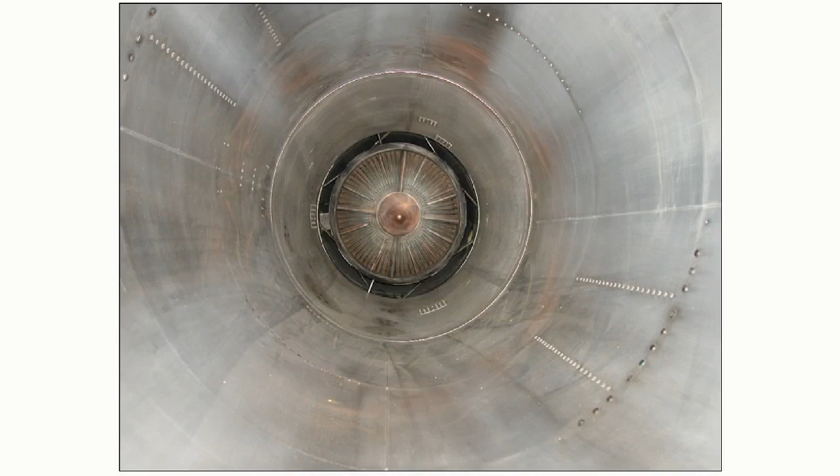The exhaust system of a gas turbine engine is an often underrated part of the propulsion unit, yet its design exerts a considerable influence on the performance of the engine.

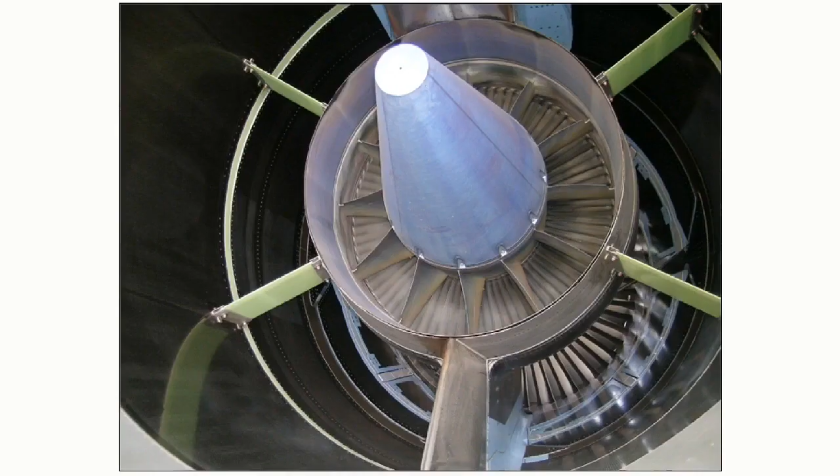The gases which discharge from the turbine must exit in the correct direction and at the optimum velocity to provide the thrust of the turbojet engine. While in the turboprop engine, where the thrust is provided by the propeller, the turbine gas temperature and back pressure at the turbine are, to a large extent, dictated by the design of the outlet nozzle.

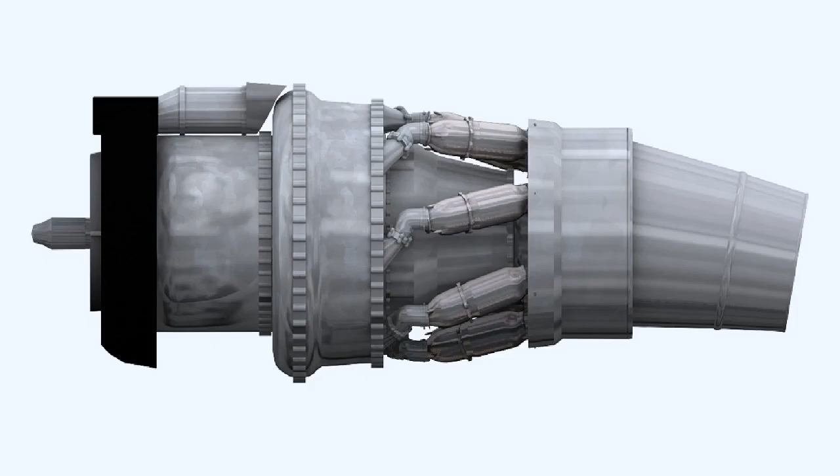The temperature of the gases entering the exhaust system can be between 550 and 850 degrees Celsius. This temperature can rise to as high as 1,500 degrees Celsius if an afterburner, sometimes called a reheat system, is used.

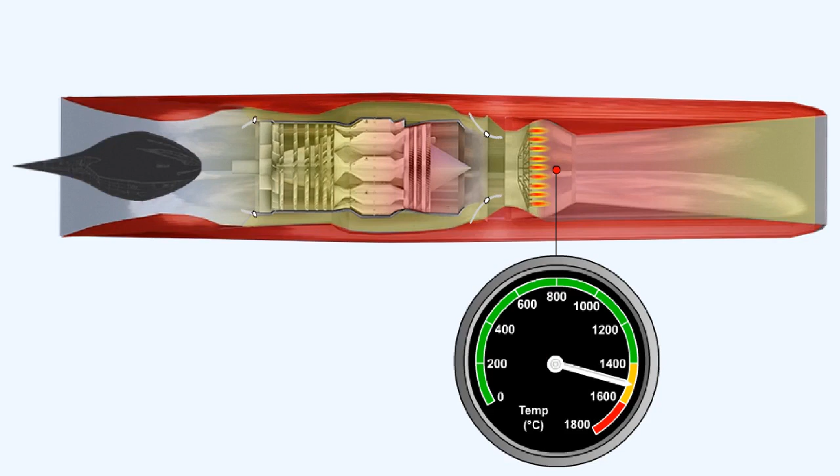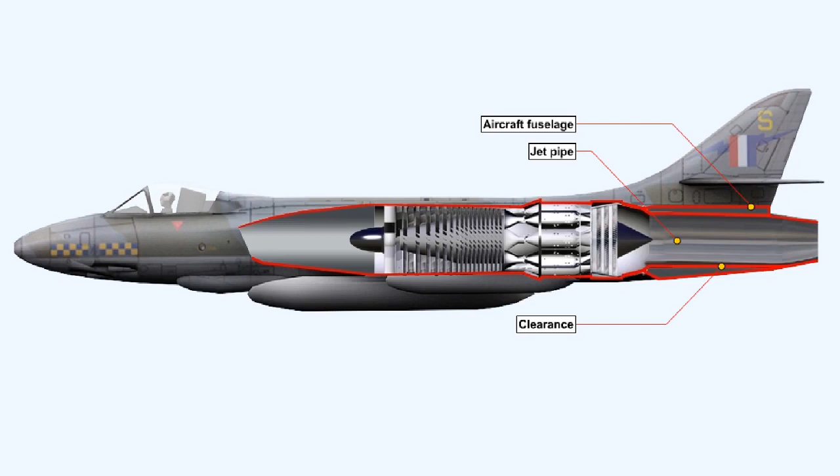The fuselage of the aircraft, if it has the exhaust system running through it, as happens with most jet fighter aircraft, must be protected from these temperatures. This is done by both allowing a clearance between the jet pipe and the aircraft skin, through which air is allowed to circulate, and insulating the jet pipe with some form of fibrous material sandwiched between thin layers of stainless steel.

The velocity of the gas as it leaves the turbine can be between 750 and 1,250 feet per second. This is somewhere around 0.5 Mach. If this gas has to negotiate a long jet pipe before being ejected into the atmosphere to provide thrust, a great deal of turbulence will be caused within the pipe. This will lower the efficiency of the engine and reduce its thrust.

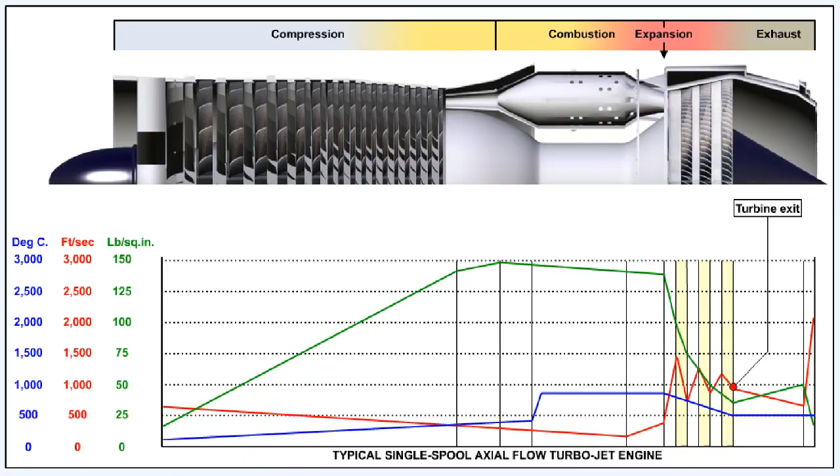This diagram shows the basic layout for the jet pipe of an aircraft without afterburners. Although the shape of the jet pipe outer casing appears to be convergent at the point where the gas leaves the turbine, the shape of the volume within the casing is in fact divergent.

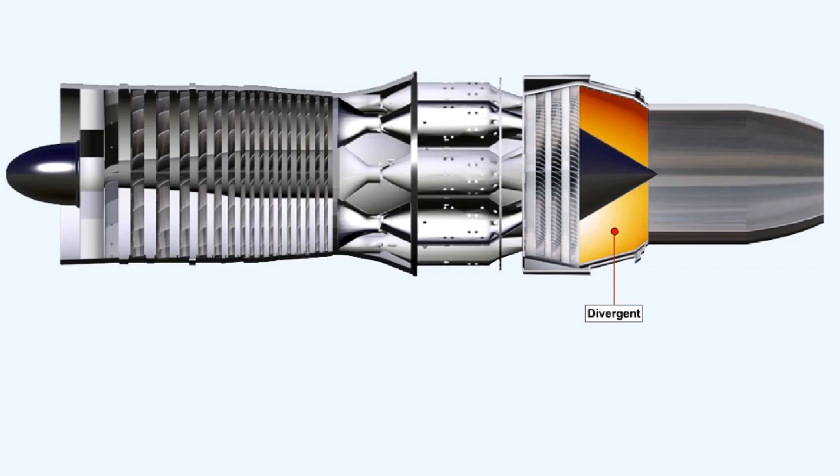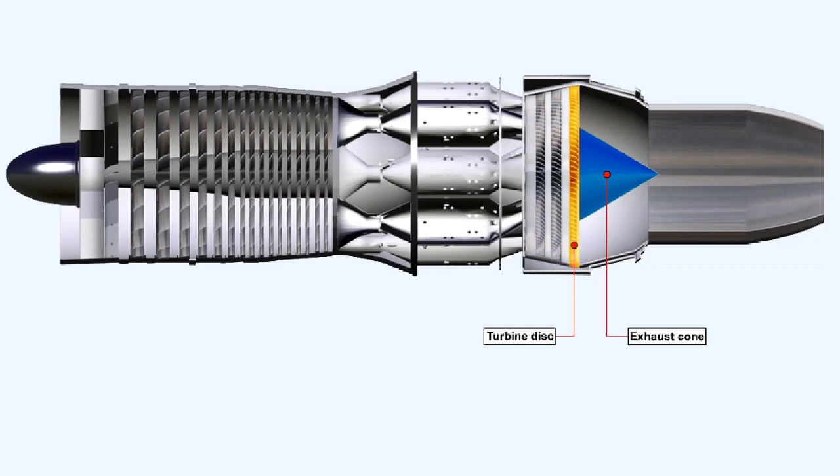The divergence is made possible by the insertion of the exhaust cone, a conical-shaped device positioned close up to the rear turbine disc rear face.

As well as helping to reduce the velocity of the gases leaving the turbine before they pass down the length of the jet pipe, so minimizing turbulence, the exhaust cone also prevents the hot gases flowing across the rear disc face of the turbine, further reducing disturbance and preventing overheating of the disc.

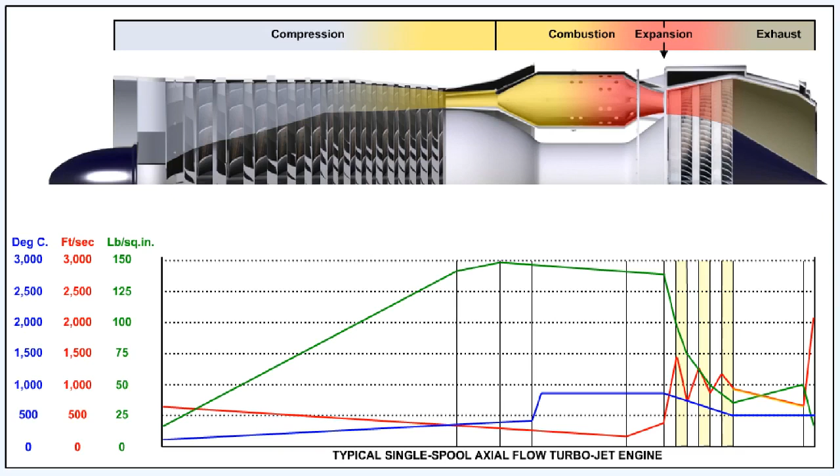The rear turbine bearing is also supported inside the exhaust cone via turbine rear support struts, which are streamlined by fairings.

The fairings also straighten out any residual whirl which may exist in the gas stream as it exits the turbine. This residual whirl would cause additional losses through generating turbulence if it was allowed to pass into the jet pipe.

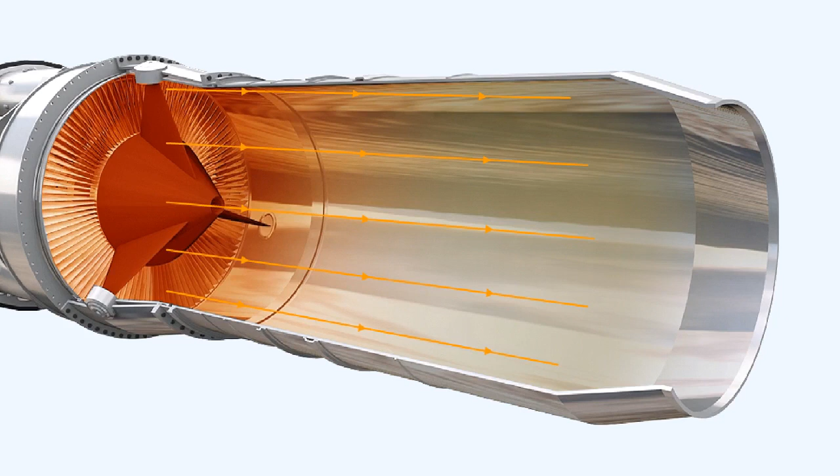The exhaust gases travel down the jet pipe and finally exit to atmosphere via the convergent propelling nozzle. The convergent propelling nozzle increases the gas velocity to speeds of Mach 1, the speed of sound in relation to the temperature of the gases, in a turbojet engine at virtually all throttle openings above idle. At this velocity, sonic speed, the nozzle is said to be choked.

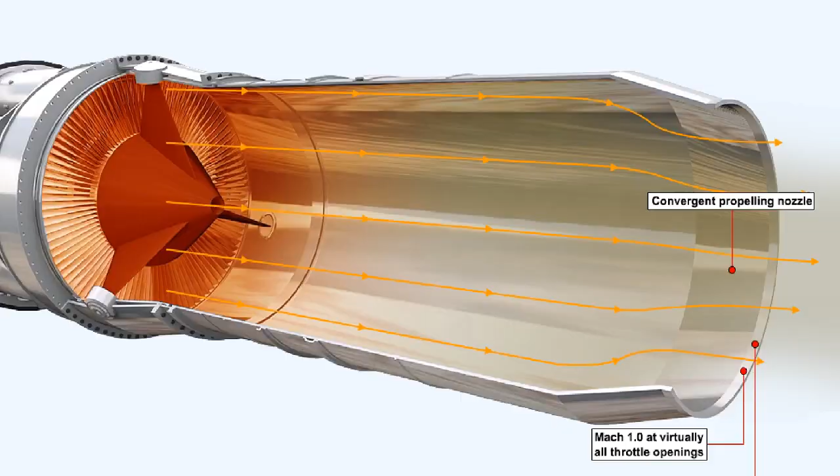The area around operating gas turbine engines is inherently dangerous to personnel and equipment. This diagram indicates the primary danger zones around the intake and exhaust of an engine similar to the type fitted to the Cessna Citation. The more powerful the engine, the further these zones will extend from the engine.

Notice that the gas velocity exiting the engine is extremely high, as is its temperature, although the levels of both drop quite dramatically with increasing distance from the exhaust nozzle.

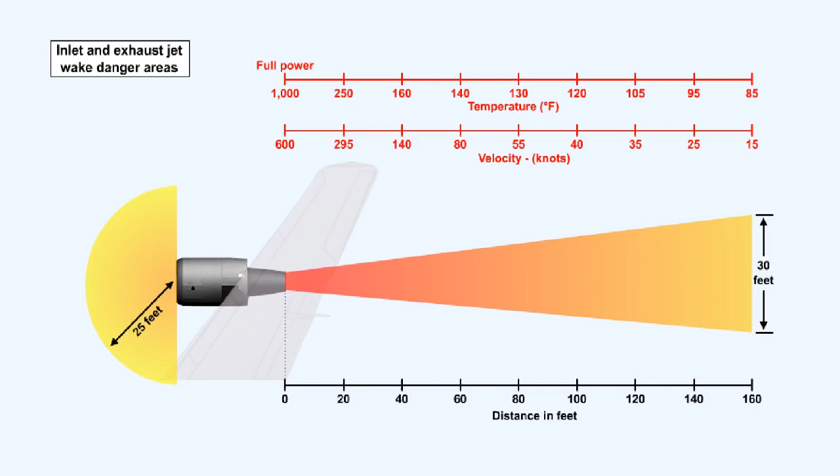The area behind an operating gas turbine engine is just as dangerous as the intake area. This short video was staged to show what can happen if the engine exhaust danger area is entered without recognition of the perils involved.

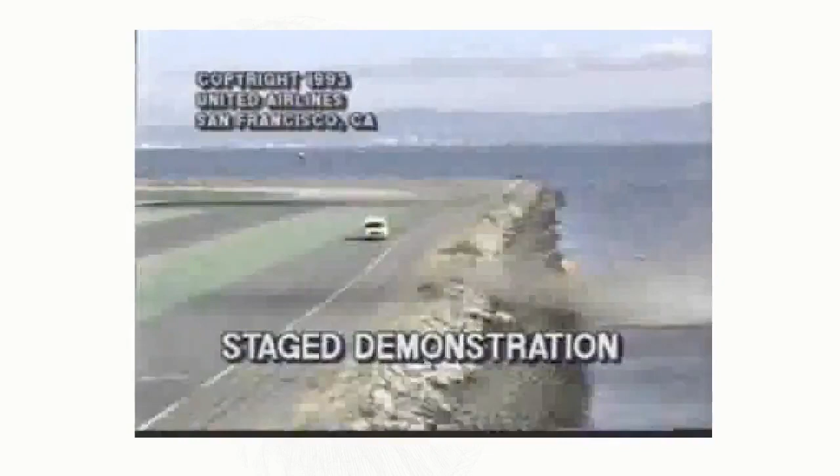In the convergent exhaust duct, the shape of the duct accelerates the gas. In a turbojet, the gas flows at subsonic speed at low thrust levels only.

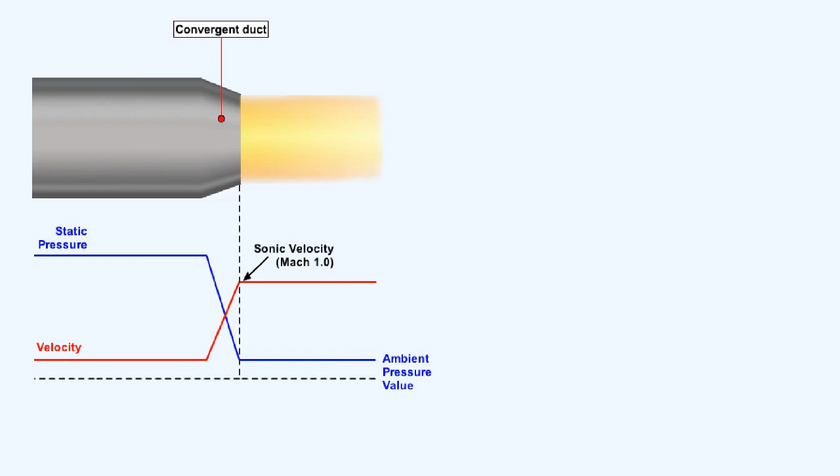At almost all levels above idle power, the exhaust velocity reaches the speed of sound in relation to the exhaust gas temperature. At this point, the nozzle is choked, which means that no further increase in velocity can be obtained unless the gas temperature is increased.

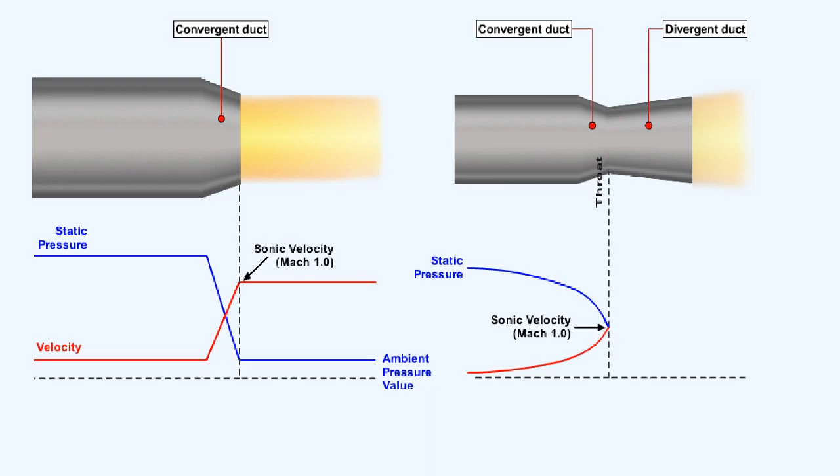As the gas flows into the divergent section, it progressively accelerates towards the open exit. The reaction to this increase in momentum is a pressure force acting on the inside wall of the nozzle. A component of this force, which acts parallel to the longitudinal axis of the nozzle, produces the further increase in thrust.

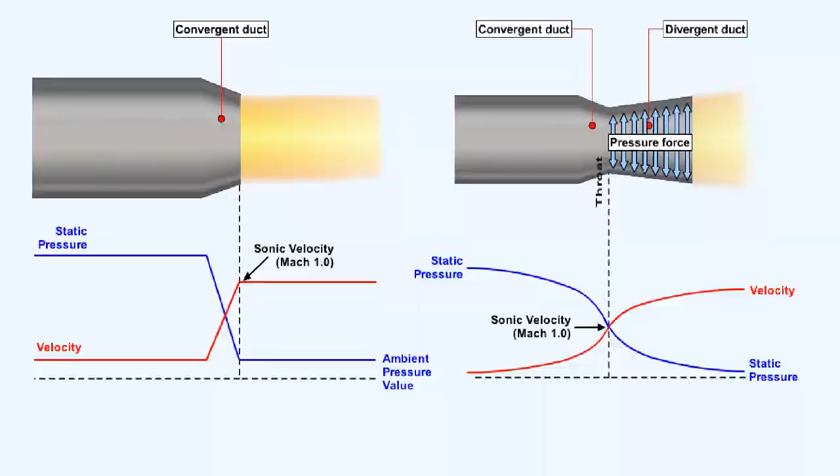Having two gas streams to pass to atmosphere makes the exhaust system of the bypass engine a slightly more complex affair than the essentially simple systems we've examined so far. The low-ratio bypass engine exhaust shown here combines the bypass air and the hot exhaust gases in a mixer unit, which ensures thorough mixing of the two streams before they're ejected into the atmosphere.

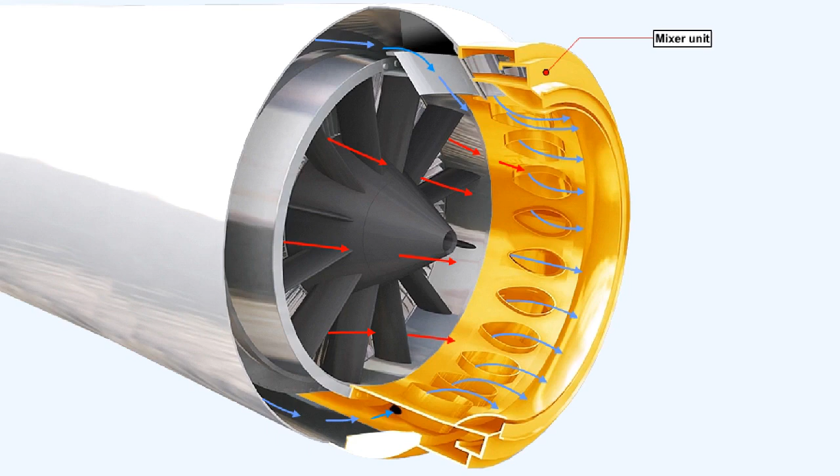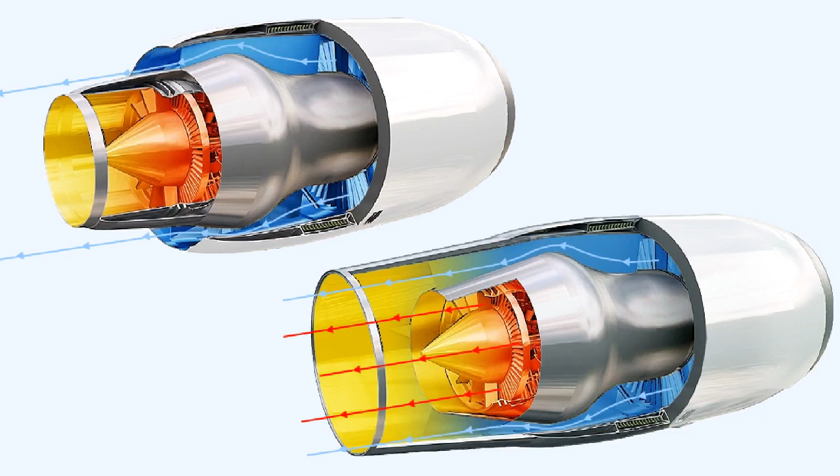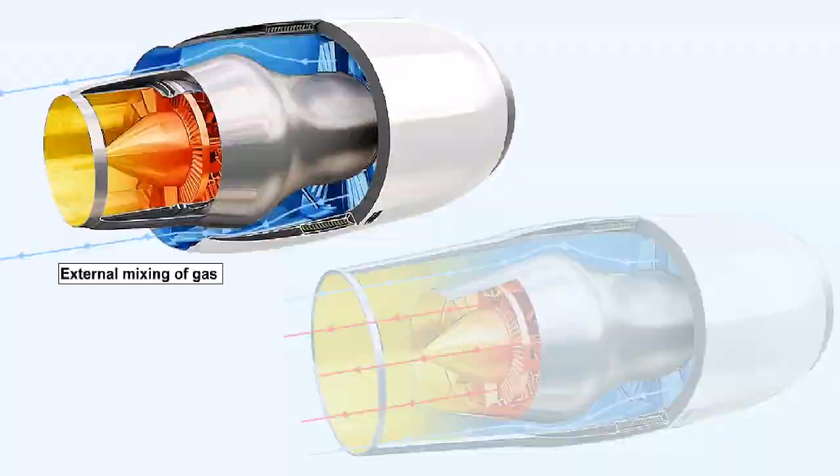This picture shows two methods used to exhaust the cold bypass air and the hot exhaust gases. The top illustration shows the standard method, whereby the hot and cold nozzles are coaxial and the two streams mix externally. Greater efficiency can, however, be obtained by fitting an integrated exhaust nozzle, depicted in the lower illustration. Within this type of unit, the two gas flows are partially mixed together before their ejection into the atmosphere.

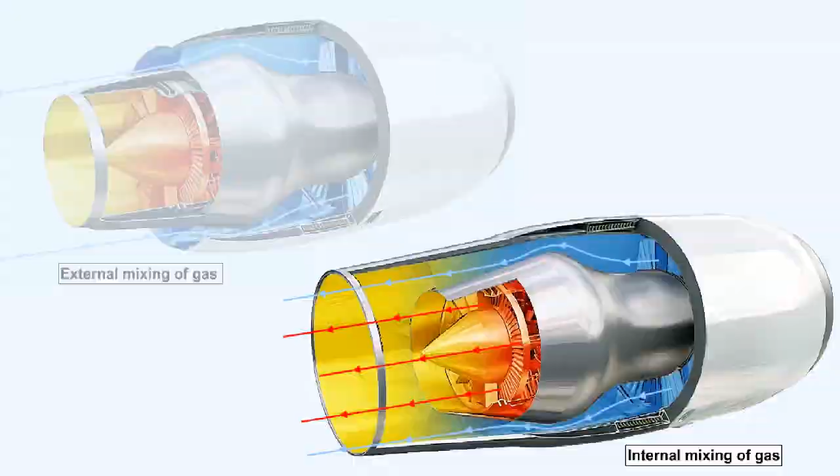This diagram shows relative sound levels from various sources, some of the highest among them being aircraft engines.

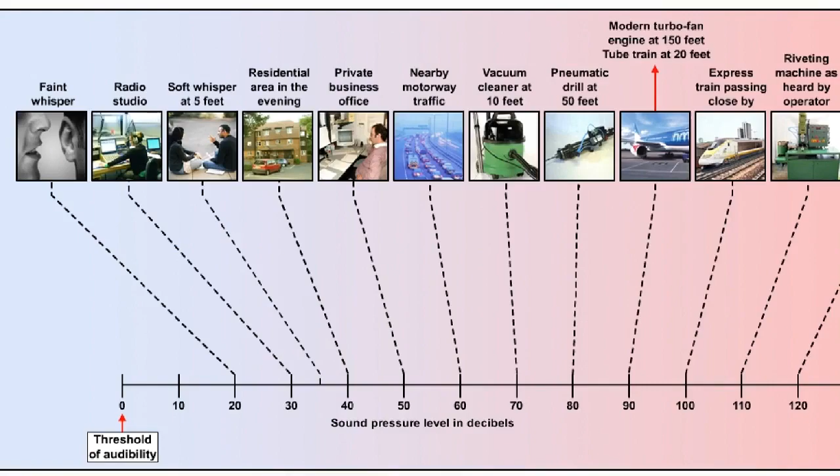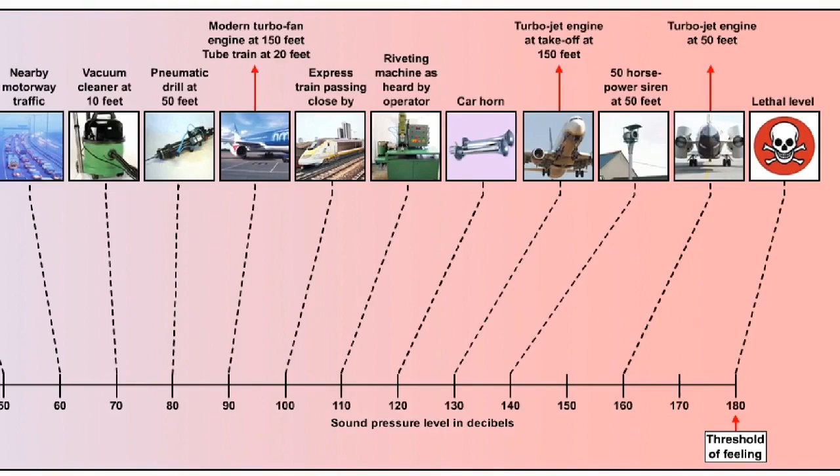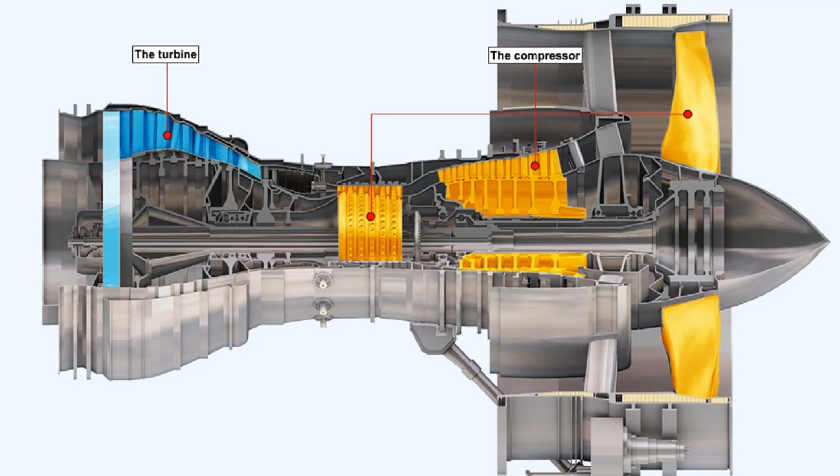Although an aircraft's overall noise signature is a combination of sounds which stem from many sources, the principal agent is the engine. Airport regulations and aircraft noise certifications governing the maximum noise level which aircraft are allowed to produce have forced rigorous research into ways of reducing that noise. The most significant source of noise from the engine originates from the compressor, the fan in the high-ratio bypass engine, the turbine, and the exhaust.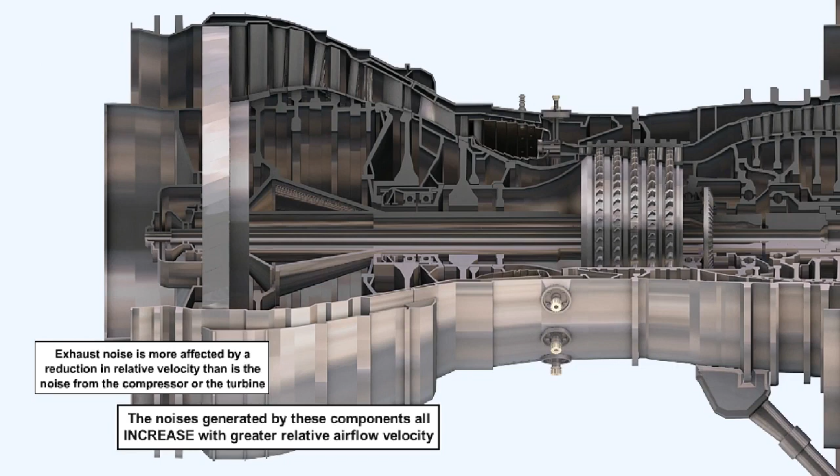Although the noises which spring from these various sources all obey slightly different laws and mechanisms of generation, their levels all increase with greater relative airflow velocity. The level of noise from the exhaust is more affected by a reduction in its velocity than the noise levels of either the compressor or the turbine are. It's logical, therefore, to expect that a reduction in exhaust jet velocity would have a stronger influence in reducing noise levels than an equivalent reduction in either compressor or turbine speeds.

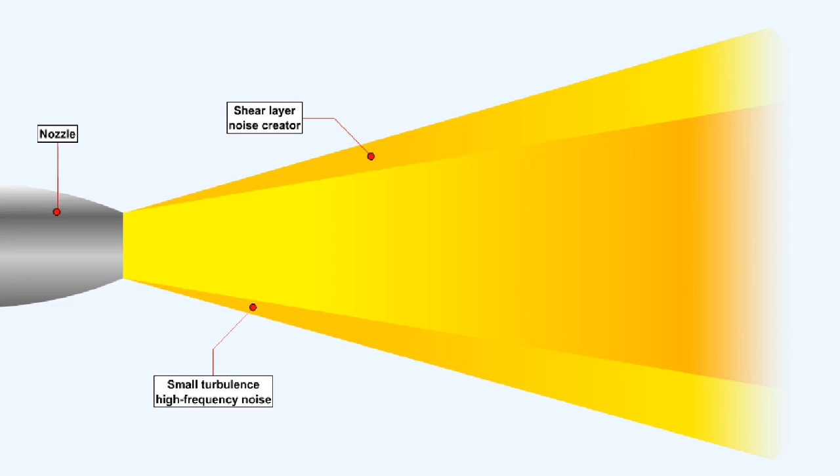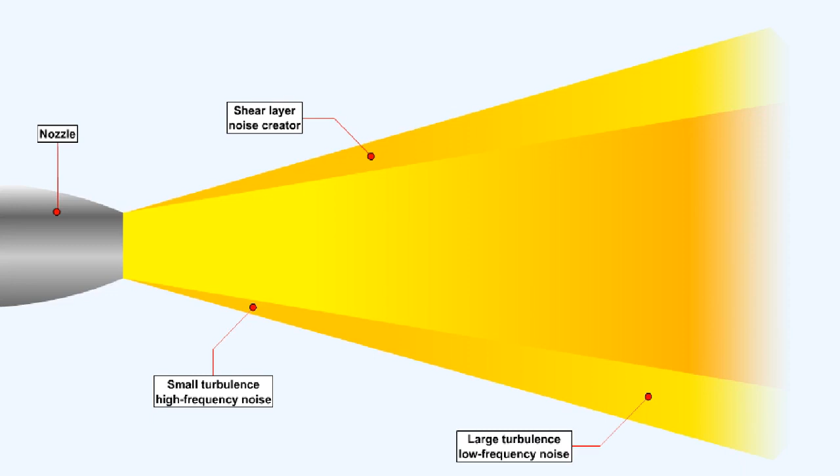The relative speed difference between the exhaust jet and the atmosphere into which it is thrusting causes a shearing action. The shearing action, in turn, creates a violent and extremely turbulent mixing pattern. Here, where the turbulence zone is narrow, is where the high-frequency noise is being generated. And here, where the turbulence zone has widened, the low-frequency noise is generated.

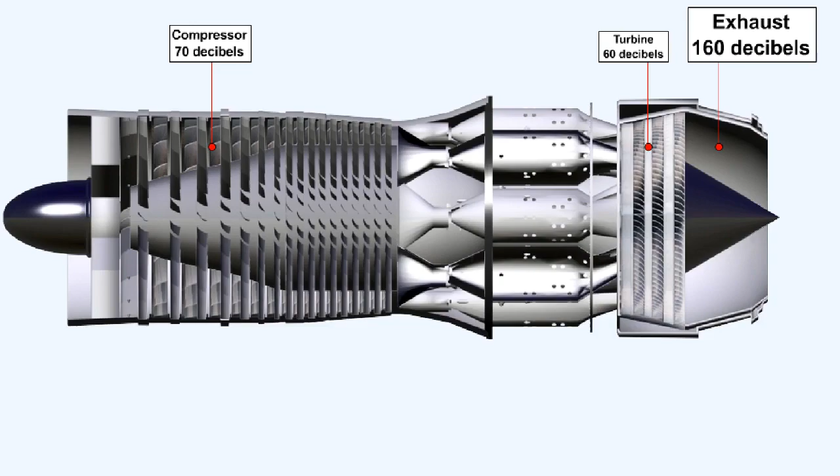The noise of the exhaust of a pure turbojet is of such a high level that the noise of the compressor and the turbine is insignificant, except at very low thrust conditions. The exhaust noise of a bypass engine drops because of the reduction in the velocity of that exhaust. But because they are handling much greater power, the turbines and the low-pressure compressor of such an engine generate a higher noise output.

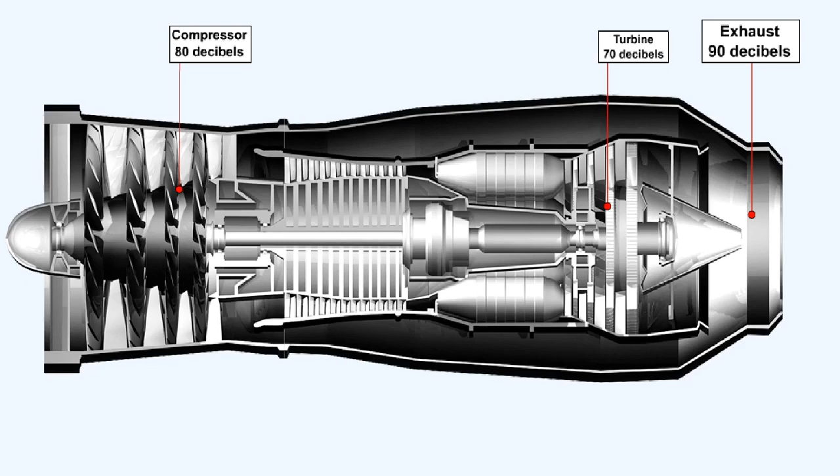In the case of a high-ratio bypass engine, say an engine with a 5:1 bypass ratio, the noise from the jet exhaust has been reduced to such a degree that the noise from the low-pressure compressor, the fan, and the turbine are now predominant.

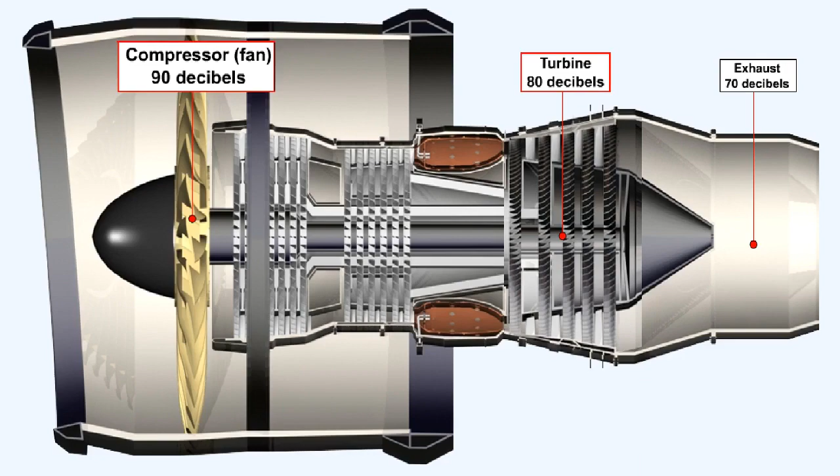Having reduced the noise levels emanating from the main source, the exhaust, engine manufacturers then concentrated on lowering the levels of noise from the rest of the engine, specifically the fan and the turbine. The use of the type of noise-absorbing material shown here in the engine intake and the bypass duct is extremely efficient in reducing noise in those regions.

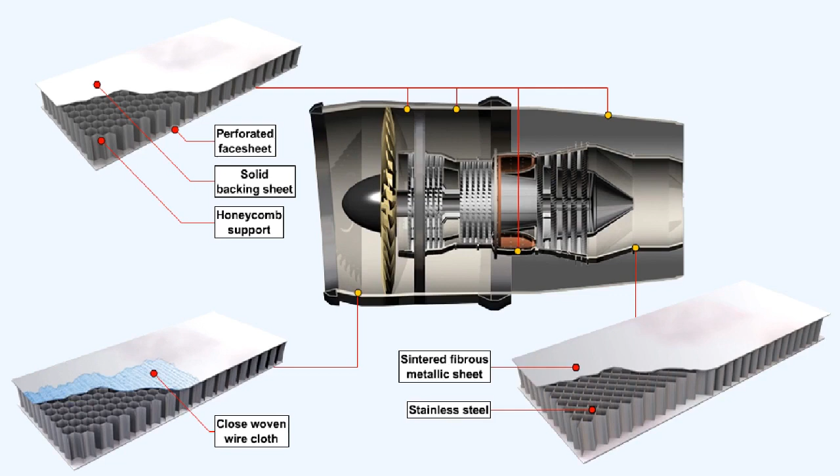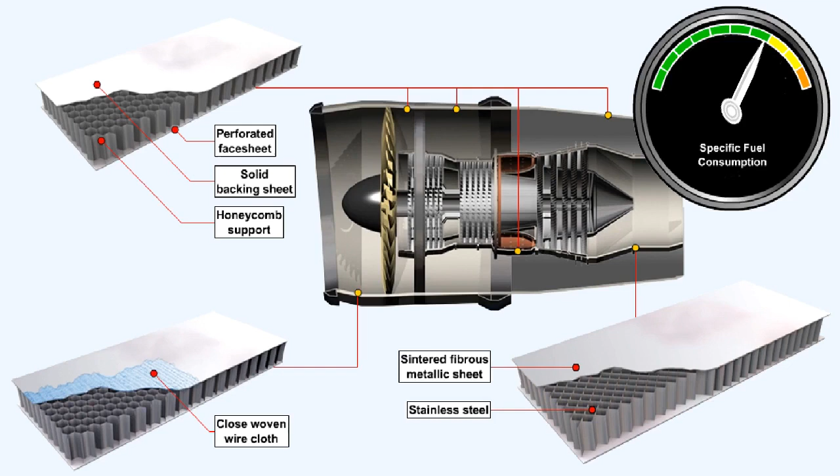Further down the engine, in the hotter zones, slightly different materials are used to great advantage in the same quest for noise reduction. The disadvantage of the use of these materials is that they add a small percentage in weight, and that their skin friction is slightly higher than the material that would otherwise be used. Together, these factors cause a slight increase in specific fuel consumption.

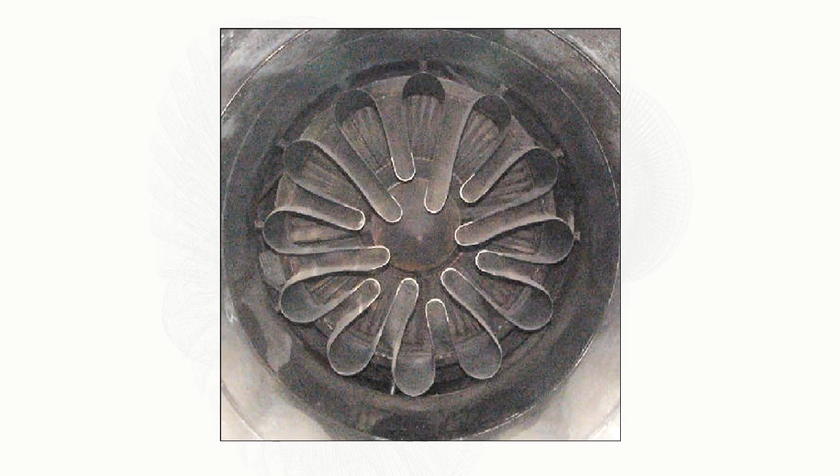Whereas modern gas turbine engines could take advantage of the new methods of sound-absorbing materials, aircraft fitted with older, pure turbojets had to find some other system of reducing their noise output. Aircraft can still be seen with corrugated internal mixers and lobe-type nozzles fitted to the rear of their power units. The latter cause the gases to flow in separate exhaust jets that rapidly mix with slower-moving air which is trapped by the lobes.

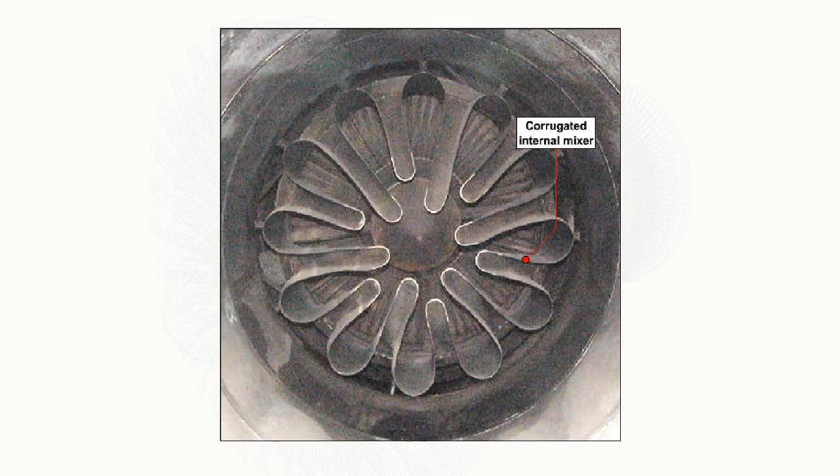The corrugated internal mixer was most efficient at reducing exhaust noise, but unfortunately it also induced performance penalties that limited its popularity with aircraft operators. This concludes the lesson on the exhaust system.